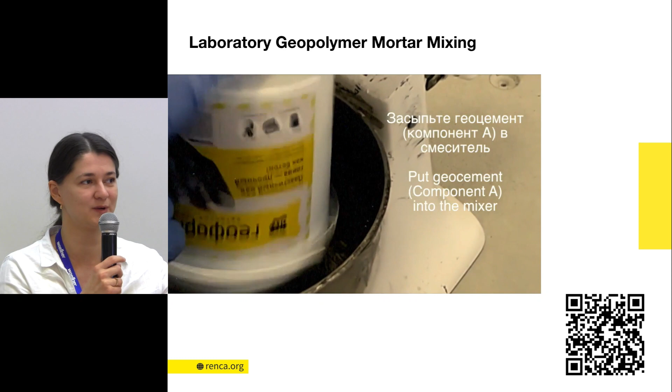We made this video to teach people the correct mixing procedure: making the binder first, then adding aggregates, how much to mix, and what procedure to follow to avoid mistakes. Because when you tell people they need to make the binder first, some people will still mix everything together, so you need to show exactly what you mean. When we work in the lab, we have very small dosages of materials, so we can be very precise. We weigh all materials in grams and follow the procedure strictly.

When you work in the laboratory, you don't face problems with equipment. You only test your material for 3D printability most of the time, and you don't have to worry about the pump, cleaning the tubes, or the speed of the extruder—all issues you'll face later when you scale up.

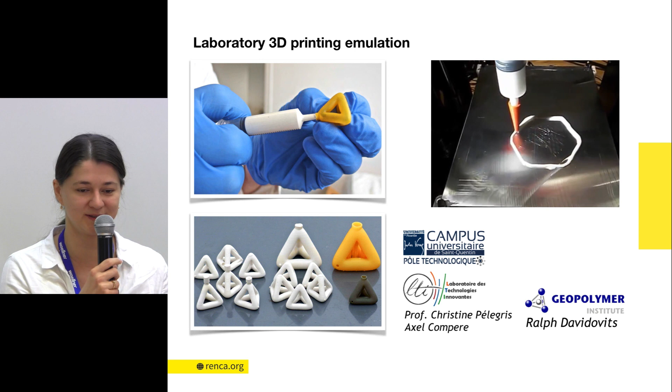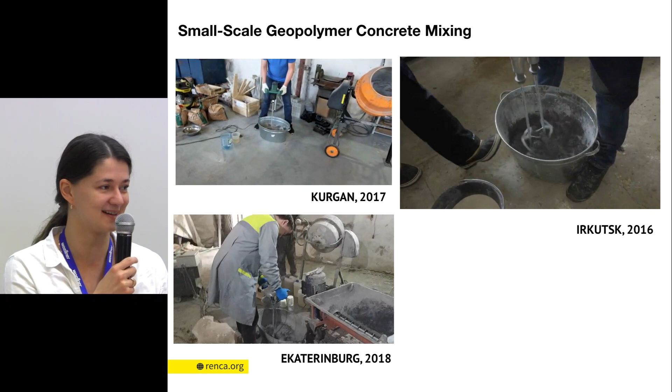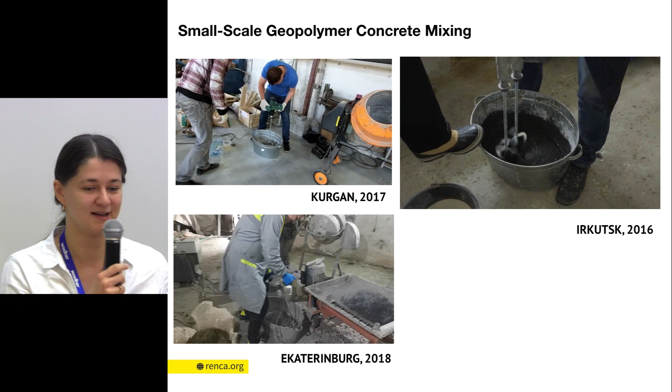In 2016, we had our first tests of 3D printing geopolymer. Everything was done manually, so the guys broke their backs, and of course the materials were brought by plane. The materials were very precisely dosed, we had a perfect composition for our recipe, and the results were amazing. With some recipes we got 80 MPa, with others 50 MPa—much more than enough. We had success from the first attempt.

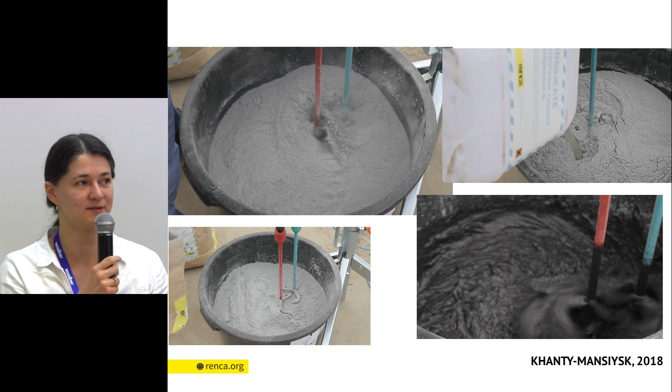After the guys had problems with their backs, we advanced to a better mixer with support. But the dosing is still manual, so you can bring materials from far away—cost isn't a big issue, though you have to buy some materials. But it's very dependent on the person mixing, so you need very well-educated engineers for dosing and mixing, because we had issues when we tried to teach the 3D printer guys how to mix geopolymer.

Each batch was different even though the recipe was the same, everything was the same, and we were watching them. But each time something was different—one time they didn't clean the mixer, another time there was material left in the bucket, another time they thought, why should we be so precise, let's just add a little more water or whatever. So one time you'd get 30 minutes of setting time, another time an hour and a half—for 3D printing that's crucial, very critical. Each batch ends up unique depending on who is mixing it.

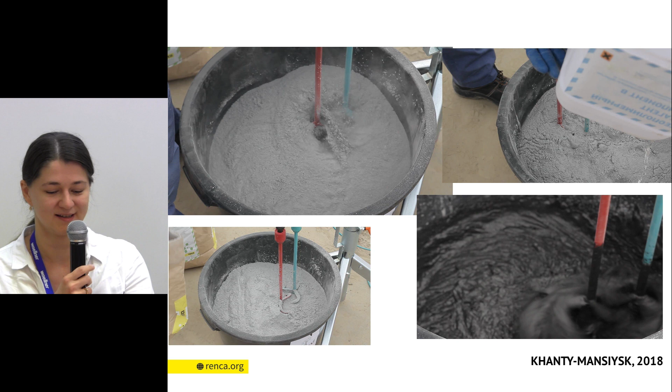As I said, you can bring very expensive materials for this small-scale pilot project. We brought them by plane to Irkutsk from another part of Russia, and I know we can send to Italy, Axel can send to us, and the cost of the final recipe can be up to 10 euro per kilo, which is not scalable at all if we're talking about construction.

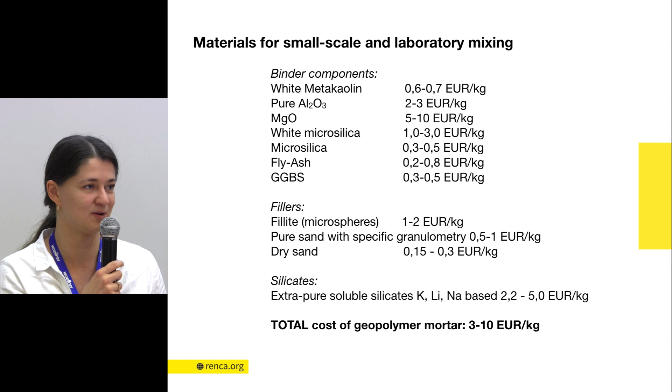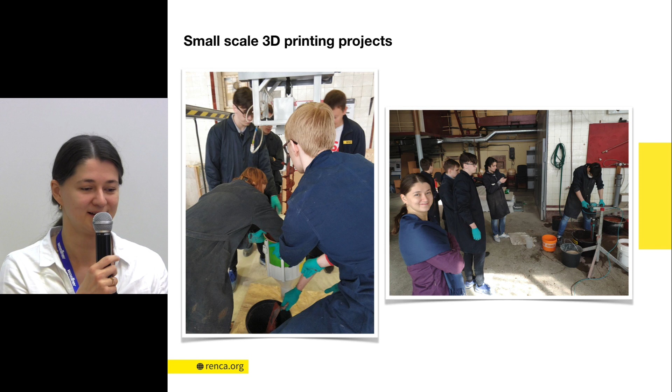For 3D printing small projects, you don't think it's all automatic right now, that you press a button and the printer does its job. No, it's about 10 engineers running around, fixing all the parts of the machines, fixing the mix. For now, it's still small-scale 3D printing projects, really just testing.

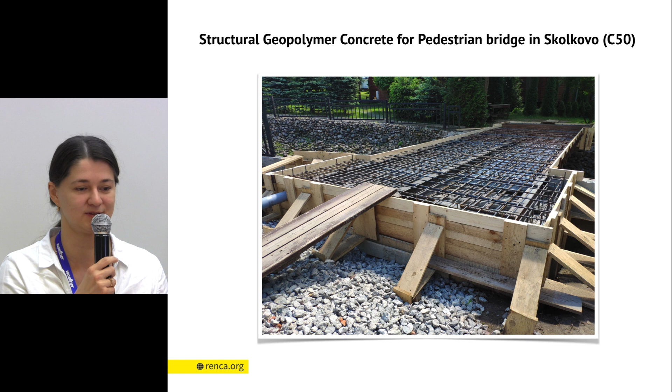So you have to prepare all your materials at your job site in advance. You have to dose them. What we do is have a bag, precisely weighed, with a precise weight of reagent that you put into this bag, and precisely weighed aggregates. It's the only way to try to avoid mistakes at the job sites, because people will weigh the material, you see the mixer, not in grams, but in buckets and the amount of buckets and spades that they throw into the mixer.

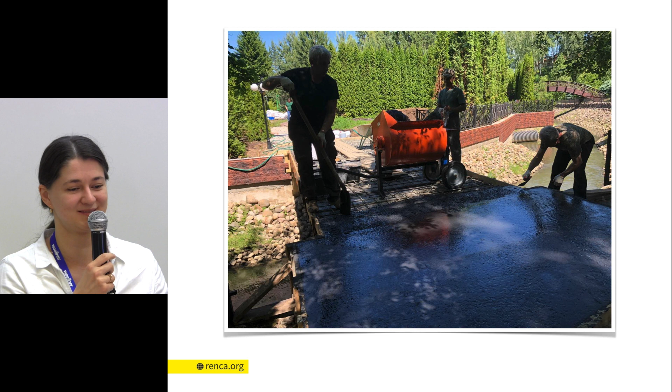So to avoid mistakes as much as possible, you have to do everything in advance. Here, the high-tech should be as minimum as possible - you should do all your high-tech before.

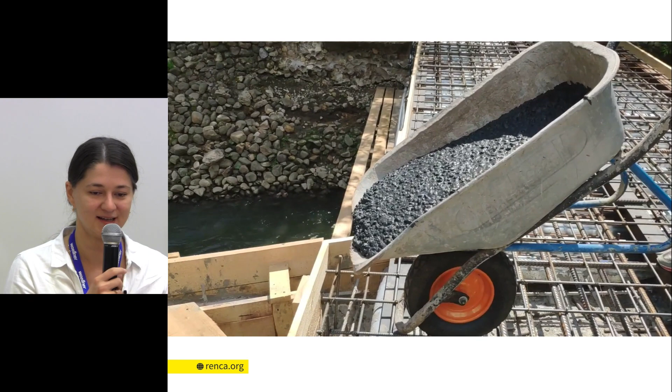And so the equipment is really basic. Of course, the preciseness of these recipes is much less, but we don't need extra high super performance concrete here. The task was to get C50, so we get this C50 easily with geopolymer, because geopolymer can afford much more strength. We try to make it a little bit more, to make this kind of gap, because we knew there would be some mistakes and fluctuations on the job site - it's unavoidable when you deal with people.

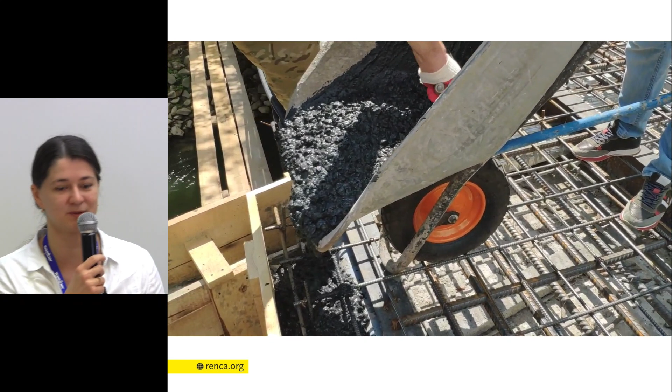So this is how we now supply the material. It should be precisely weighed and dosed in advance.

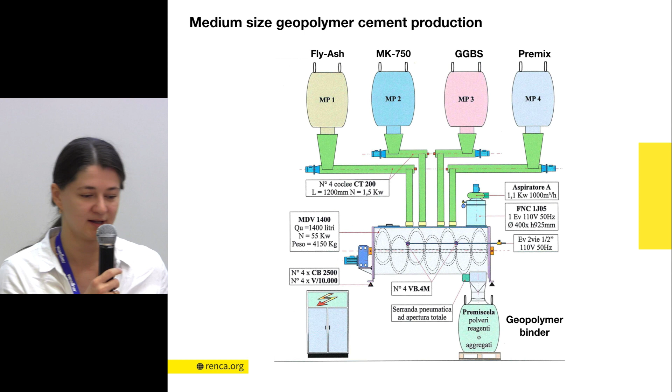So we need equipment to produce geopolymer right now. For medium-size geopolymer cement production, you don't need a very big mixer, but it is still equipment, so you need to put investment - you cannot make it by hand anymore. It's not a laboratory anymore, and you also bring materials not in small bags anymore. You have to pay for your materials, you have to deliver them, so you have to really look for the source of material closer to you, cheaper to you, so you have less choice, and you have to work with what you have, with what you can get cheaper.

You still don't buy it by full trucks, so the cost for you will be much higher than for bigger production, and we will talk about costs a little more.

And now we go to the most important thing, the cost of raw materials. It's a good example that we have with fly ash. For example, when you buy it like one ton, the fly ash itself costs 2 euros per ton at the factory, at the power plant - so it's nothing, it's very cheap. But then you cannot buy it in a truck, you need a big bag, for example one ton. The factory itself, the power plant, doesn't sell in big bags - they are not working with that.

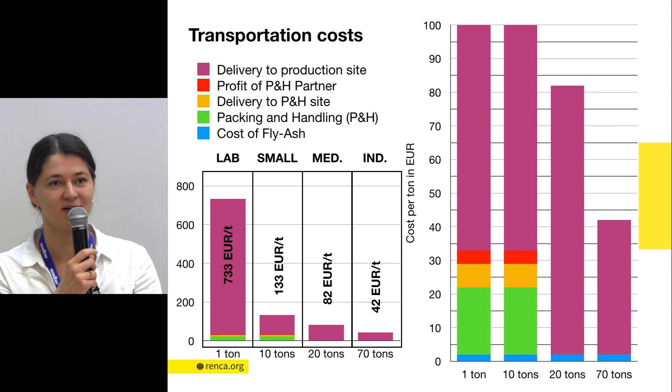So there is a partner who is handling fly ash. This partner needs to earn money. He needs to transport fly ash from the power plant to his site, and process it into big bags. So we add the price of the big bag. This is the green part, which adds a profit with the packing and handling, then delivery to their site, and a small profit for this partner who is doing the handling.

Then we need to deliver this fly ash from this partner to our site, and this is the biggest cost. It costs more than 700 euros, because nobody will just go with 1 ton. There has to be a full truck, and the full truck costs 700 euros. So your 1 ton of fly ash turns from 2 euros to more than 700 euros if you buy only 1 ton.

If you need 10 tons, it gets a little lower because you divide the same cost across 10 tons, but you still need a handling partner to put it all in big bags. You only start getting some economy when you buy into 20-ton full trucks without big bags, so in bulk. But to buy bulk, you need your own silo storage. You need a bigger production site of your own, and then the cost becomes more reasonable, but still not 2 euros.

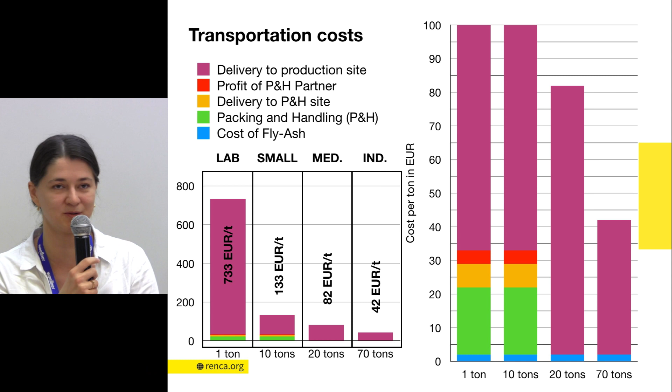Because when people start calculating the recipes, usually they think fly ash costs 2 euros, it's nothing, let's use fly ash. But then you need to calculate how much it will cost at your site, and whether you can receive it in bulk or not.

So make all these calculations. And when we go really industrial, you need to have silo storages. You need a big investment into your production site. Here you reduce operational costs on your products, on transportation, on all your raw materials, but you need to have an investment.

The first thing you need to think about when making a geopolymer production plant is where to place it. For example, in Russia, we have this situation: we have resources in the eastern part, most of the raw materials are there, but the clients are in Moscow and St. Petersburg, which is 2,000 kilometers away.

So it's up to us to calculate where we should make it — near resources, where transportation of resources will be cheap for us, or near the client, where transportation of the ready good will be cheap for us. This is something you need to calculate on your own, depending on where you are.

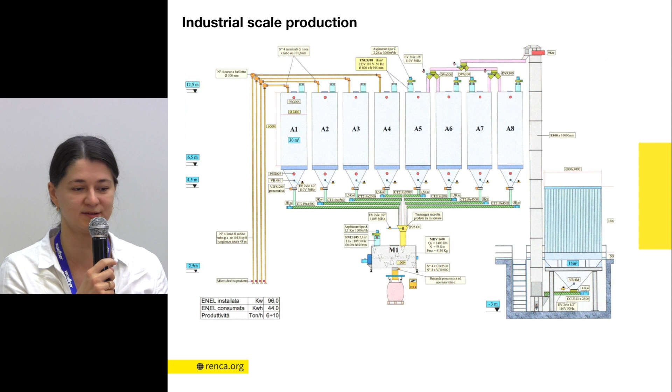For industrial scale, you need a real dry mixing plant, but the investment is not comparable to Portland cement production, where you need 200 million euros minimum for one plant. Here we need 20 times less investment. We just need a dry mixing plant, and we don't need kilns or to burn gas or whatever.

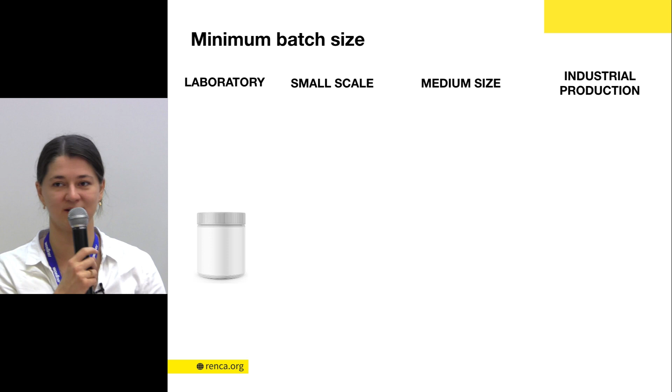But there are limitations that come with the big scale. When you have a laboratory, you can make, say, 50 grams of 3D printing mortar, then 50 grams of repair mortar, then 50 grams of construction geopolymer according to request.

But the bigger you go, the bigger the minimum batch you can produce. You cannot produce a small mix of 5 kilos — you need to produce several tons, several tens of tons. So you need to have orders for this kind of product. The range of products you can produce goes down, but the amount you produce of one product goes up. All this reduces the final cost of the product the bigger you go, but there are certain limits.

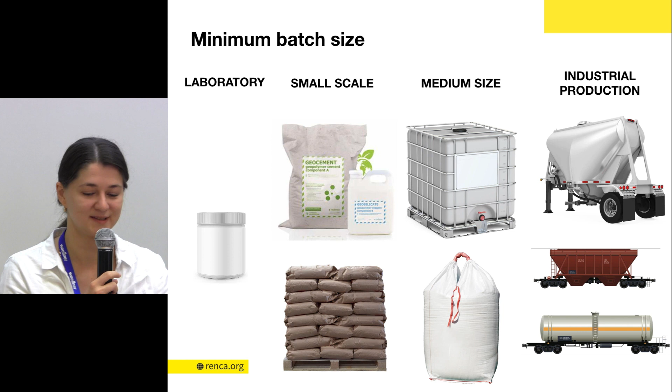So if you have questions about economy, you can ask me, but I will switch now to the more technical side, to Andrey. Okay, let me speak now a little bit more about industrial application of geopolymer concrete and products based on it that we have done.

One of the products that we have realized is humid earth blocks and pavement tiles. This is a product without a high amount of binder. It has a humid earth consistency, and we have one project going on right now, developing and adapting the geopolymer cement to produce these construction blocks.

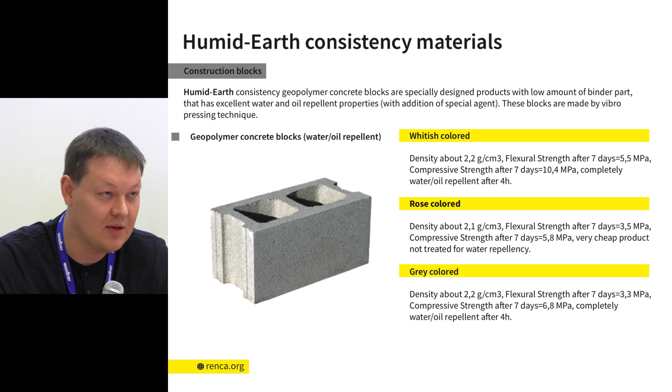These blocks are more resistant to aggressive substances and corrosive media, and it's also possible to make them oil and water repellent. Taking this into account, this kind of product must be cheap. We offer a solution that, for example, for pavement self-locking tiles, only the top layer needs to be made of geopolymer, and the rest is the cheapest based on ordinary Portland cement. This allows us to save cost and give the final product some unprecedented properties.

The other material that could be used with geopolymer is hemp. It's a very interesting material, especially when combined with geopolymer cement. Like humid earth blocks, it's pressed and formed into panels or blocks. This material doesn't burn, it can have compressive strength more than 100 MPa, it doesn't ignite, and it can also be a thermal insulating material with structural properties.

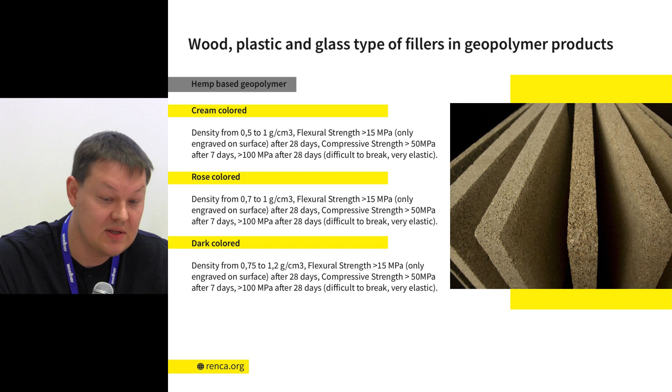This is a challenge that Renca is taking on, developing sustainable solutions for waste utilization, and we are part of the National Geographic Innovation Challenge, the Ocean of Plastic. So beside hemp, there are many types of recycled and waste material that could be used in geopolymer, because they are encapsulated inside the structure and completely mineralized.

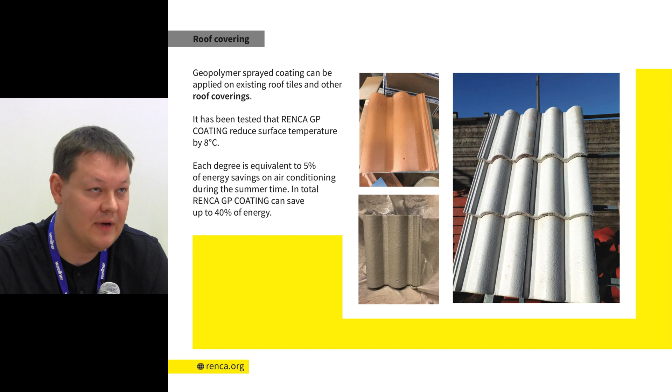Roof covering with geopolymer is also one of the unique solutions. It's possible not only to make the whole tile out of geopolymer, but also to apply geopolymer spray on existing roofs. We tested this, and the temperature on the surface of this type of covered roof was 8 degrees lower than on a roof without the coverage. Each degree is equivalent to about 5% of energy, so in total you can save up to 40% of energy for cooling the house during the summer period.

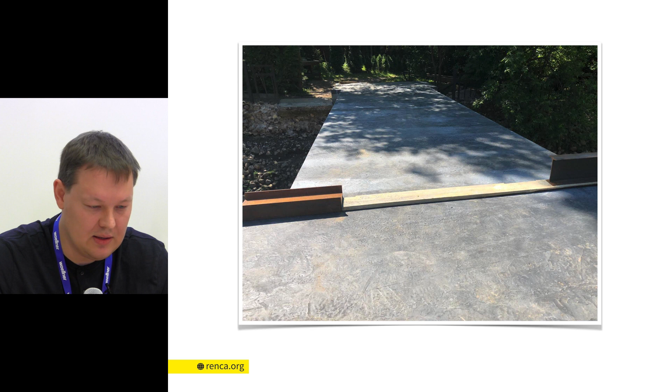This is another example of industrial application, which Marina told you about. And this is a final pedestrian bridge. This client liked geopolymer concrete so much that they asked for more, but in different colors, so we offered them red. As Joseph told yesterday, red is beautiful. We say red is the new green, and we try to be in line with this fashion.

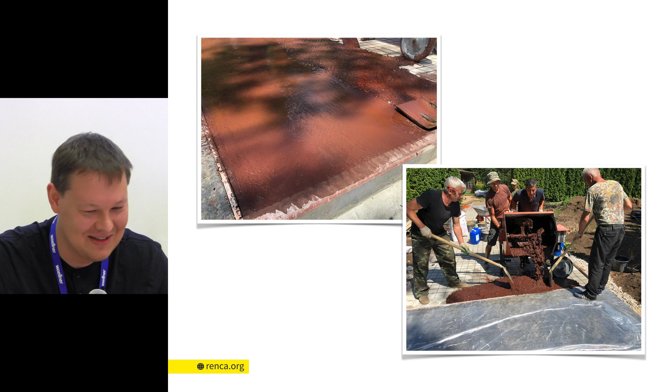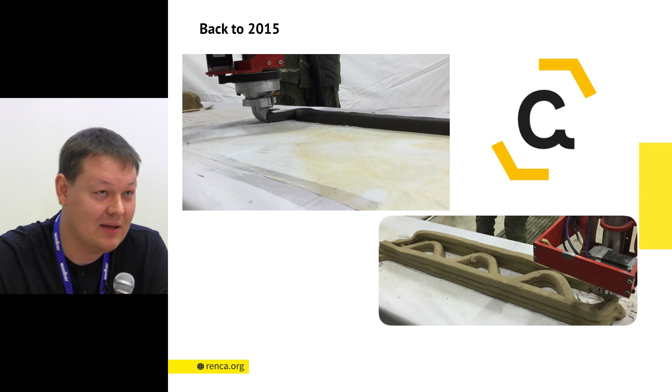Okay, so let's talk about construction 3D printing with geopolymer. It all started in 2015. Like today when we listened to Shima's presentation about the moon and said, haha, it's the moon - it was like something like this in 2015: geopolymer could be applied for 3D printing, haha.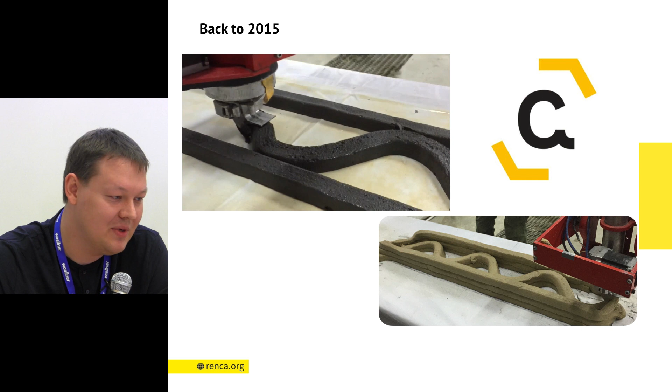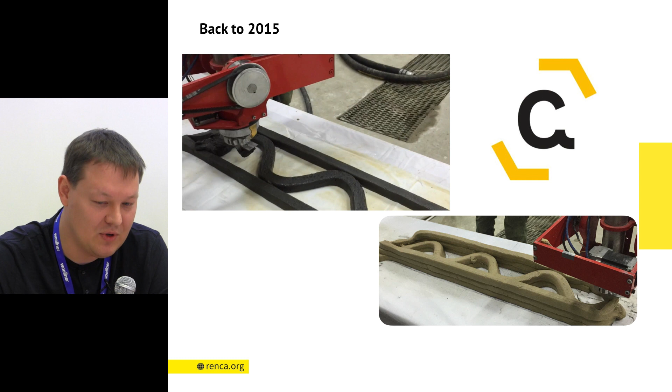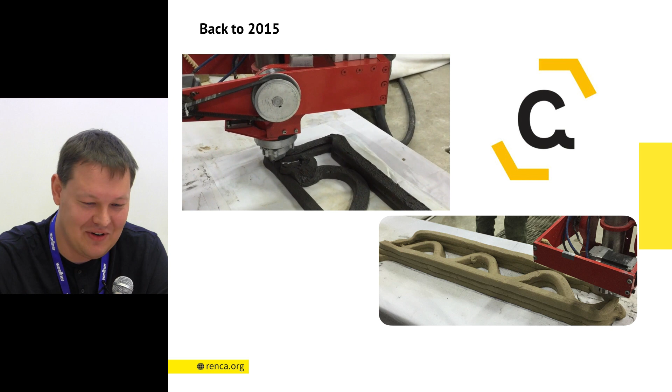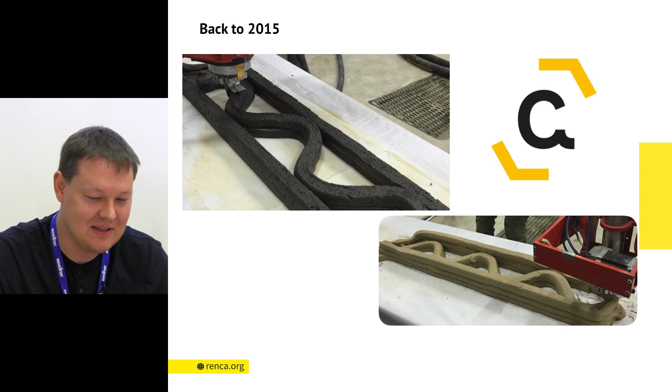At the end of 2015, we were contacted by Nikita from Apis Cor company, and he asked us to develop mortar for his 3D printer. We did it, and in January 2016, with Alex, we went to Irkutsk, in Siberia, near Lake Baikal. It was minus 40 degrees outside and plus 15 inside, and we tested three different recipes there: the black, beige, and gray one.

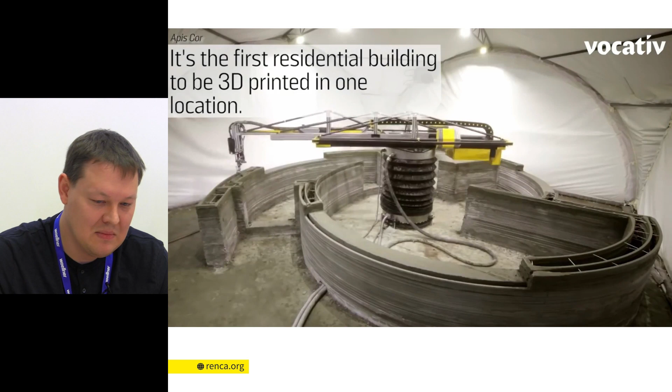If you're not familiar with Apis Cor company, this is a company originally from Irkutsk, Russia. They 3D printed a house in 24 hours, and they claim it cost as little as $10,000 United States dollars. This is a house built near Moscow, in winter.

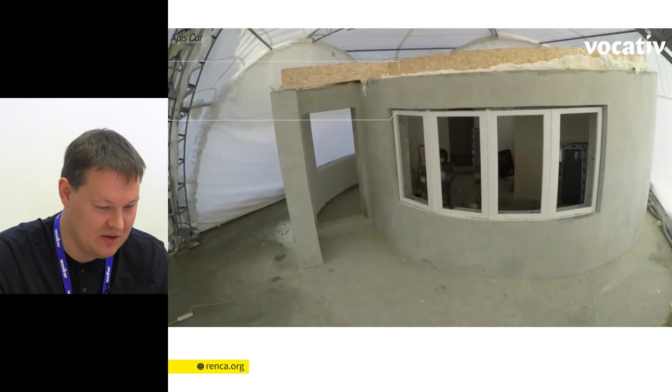Now they have moved to the United States, to Boston, and they've taken part in NASA's 3D printed habitat competition. Unfortunately, now they are not selling and producing 3D printers, they're mostly concerned about R&D, and we had to go our own way with 3D printing.

So in Irkutsk in 2015, the first idea came of needing an automatic mixing system for geopolymer concrete. In 2017, we were invited by the government of Dubai to take part in Dubai Future Accelerators. It's a government-sponsored accelerator for innovative companies, and Dubai is very keen on construction 3D printing.

Dubai has a government program stating that 25% of each building by 2030 must be 3D printed. So at the end of the program - you're laughing, but it's true. In 2019, you will not get a construction permit if you don't have 2% of 3D printed parts in your building. In 2020, it will increase, and by 2030 you will not get a construction permit without 25%. You can't build a house with 25% plastic handles - you have to have something structural, so that will force you to implement 3D printed elements in the building.

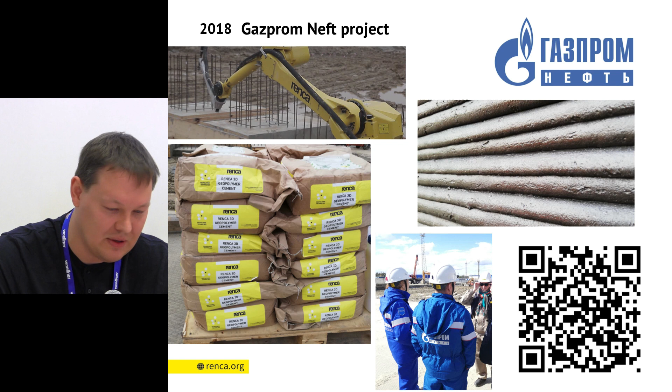Now we're in collaboration with Polytech University in St. Petersburg, helping them with their 3D printing programs and trying to promote genuine geopolymer technology among students and professors, because there is a big mess about terms, about sources of information, about alkali activation, and misunderstandings.

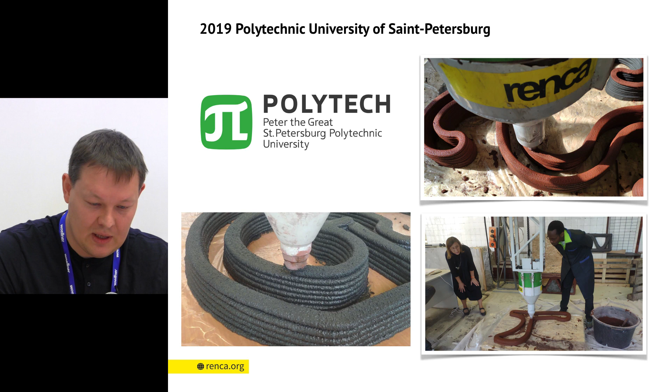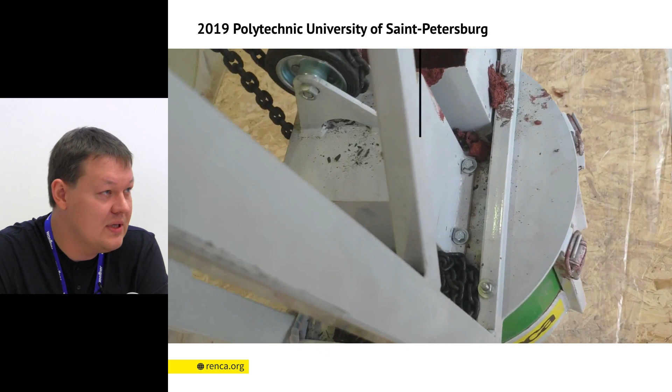We have developed geopolymer 3D printing mortar for this portal-based gantry type 3D printer. This is a kind of video. Together with the students, we not only study the recipes, but they also have the equipment to study different shapes, behavior, and construction properties of 3D printed objects made with geopolymer.

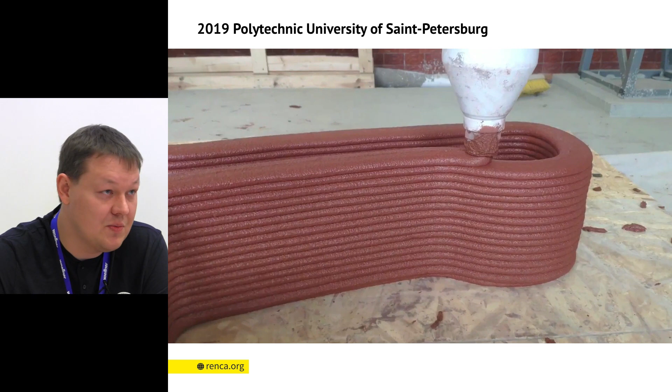It is a very small structure in the video, done in like 10 or 15 minutes, but it showed that the mortar can hold half a meter in height.

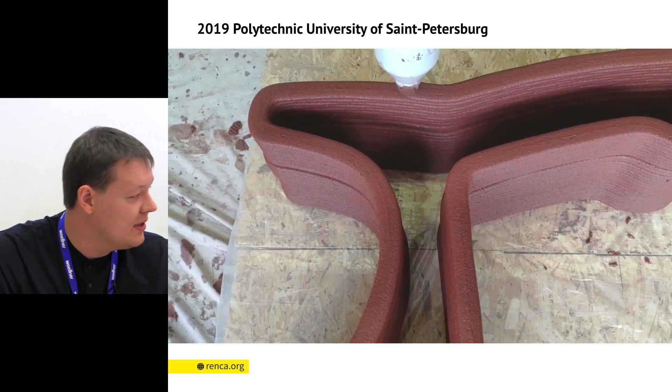You can see the samples here on the desk, so you can touch and see that the geopolymer mortar has the advantage of not having any cold joint between the layers, because with Portland cement, cold joint is quite a problem. But with geopolymer, it has very good adhesion - you can stop, take a break, or stop for the night and continue the next day, and in the end you'll have no joints.

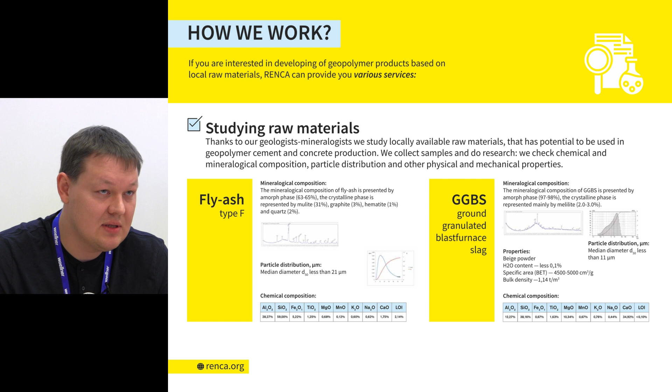So how do we work? We study the local available raw materials, starting from the mineralogy and chemistry. We take samples from local materials, develop new recipes, do testing - as the professor explained before, put it in the water - and at the end, when we get the perfect result, we go deeper and do tests of freeze-thaw cycles, resistance to acid media, and so on.

At the bottom right corner, you see the test of acid resistance for geopolymer concrete. Before that, we didn't know - we hadn't had a standard, so we used a 10% sulfuric acid solution. Now we will definitely use a 5% solution, so we can compare results among other researchers.

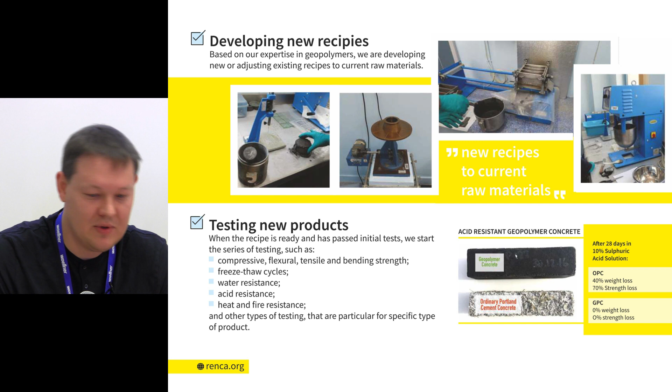Developing standards is very important because it allows us to compare what we've done in our lab with what you've done here, and so on.

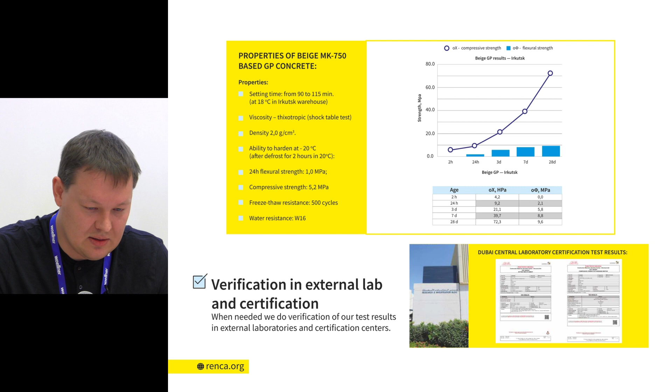Of course, if a client needs it, we do verification in an external lab. So we've done such tests in Dubai Central Laboratory in order to show the properties of geopolymer mortar for 3D printing based on their material.

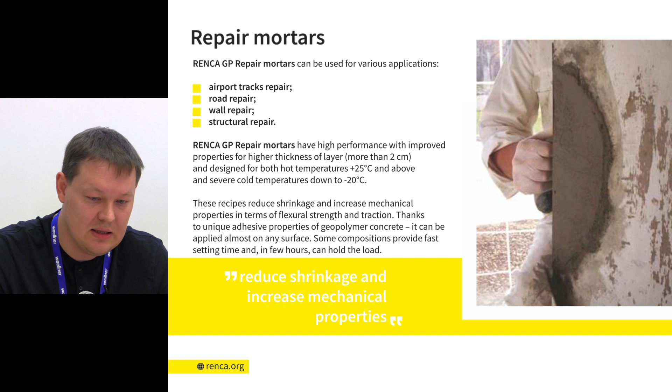We produce geopolymer cements and geosilicates. One of the main products is repair mortars - ready products that can be applied to airport tracks because they're fast hardening, as well as road repair and wall repair. Of course, we also have 3D printing mortars for different temperatures, for winter and summer, because it's very dependent on this.

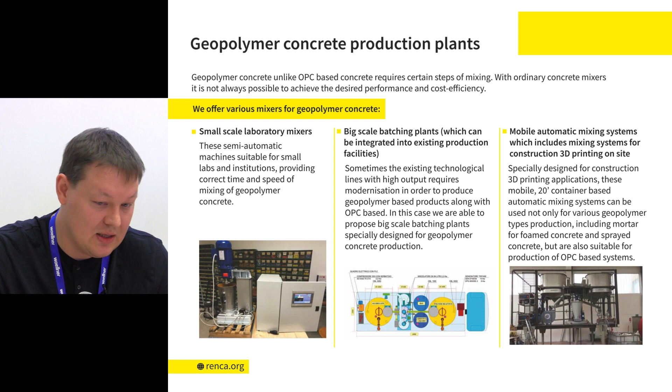With the cooperation of our Italian partners, we can offer a full line of equipment for geopolymer cement production. Alex will tell you more about the small-scale laboratory mixers, medium-scale, and big-scale. I will show you the scheme for possible integration of a geopolymer binder or cement mix unit into an existing concrete plant when you scale to a real plant.

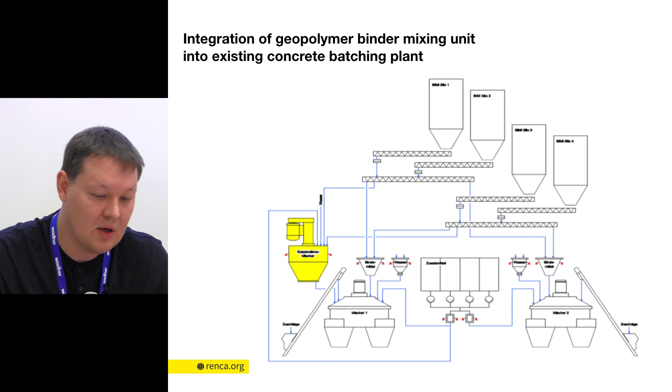So it will prepare, dose, and correct mix the geopolymer cement, and when it's ready, it will discharge it into the existing mixer, and it will be mixed with aggregates, a conventional way to prepare geopolymer concrete. This solution allows saving a lot of costs on the full-size concrete plant, and makes it possible to produce geopolymer concrete along with OPC on the same equipment, especially if you already have silos or mixers for OPC production.

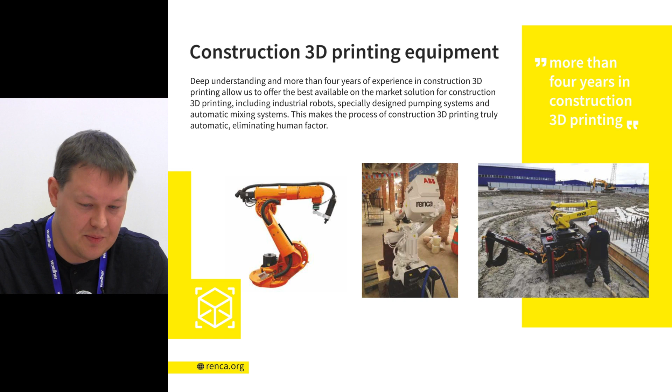We have been working with almost every type of existing 3D printer and know exactly what to do to achieve the best results, and what type of mixer and pump to use. So we do consulting on the equipment you need for construction, 3D printing, pumps, and so on. We want to be an all-in-one partner, an all-in-one solution, starting from geopolymer cement production, concrete mixing, and construction 3D printing.

So we already have some international sales, and we are happy today that we have some representation from Curacao, and one of the representatives is here.

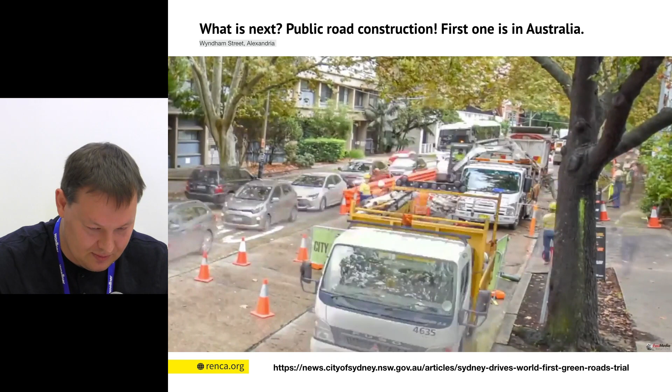And I saved some time to show you some recent developments in the world of geopolymer concrete. In Australia recently, in Sydney, Wagner's made a part of a public road to the airport. This is a video of how they made it with geopolymer concrete—now you can go to Australia and see it. This is the world's first roadway made with geopolymer concrete.

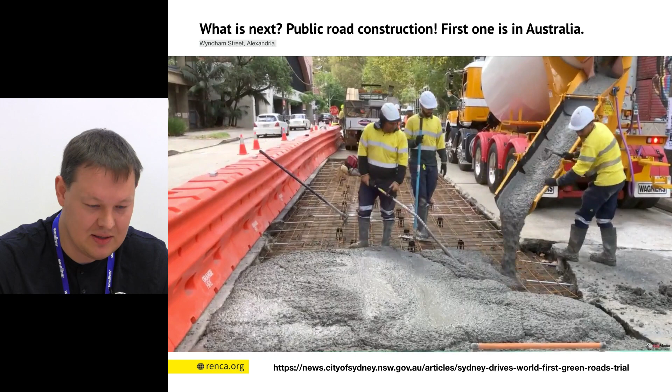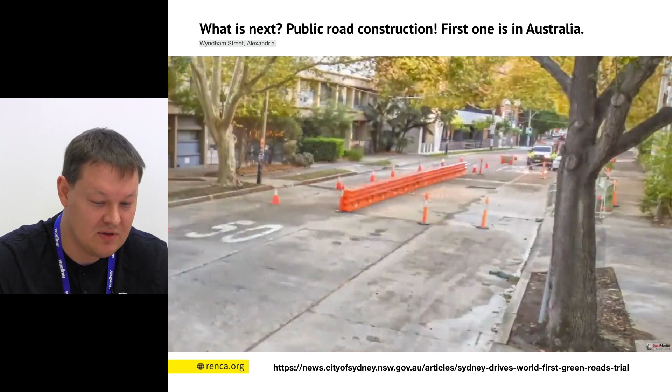It's short, but it's on a public road. Researchers from Sydney and the CRC for Low Carbon Living Institution will use the results from that trial—they installed some sensors inside—and they will use the results to create the first set of industry guidelines for geopolymer concrete.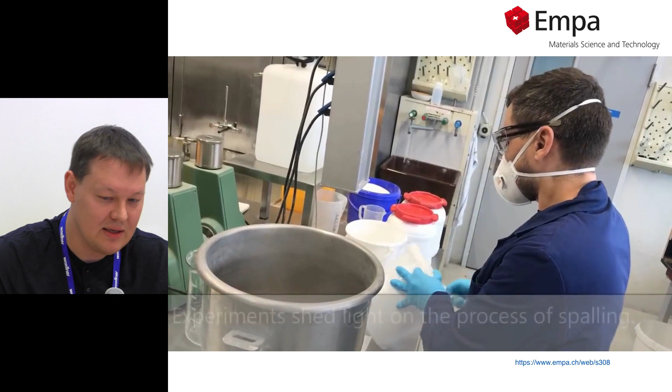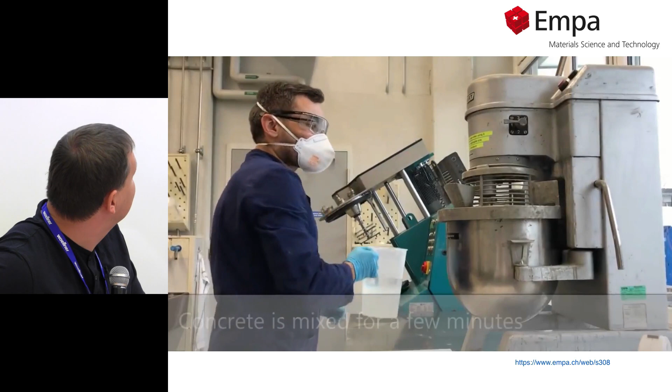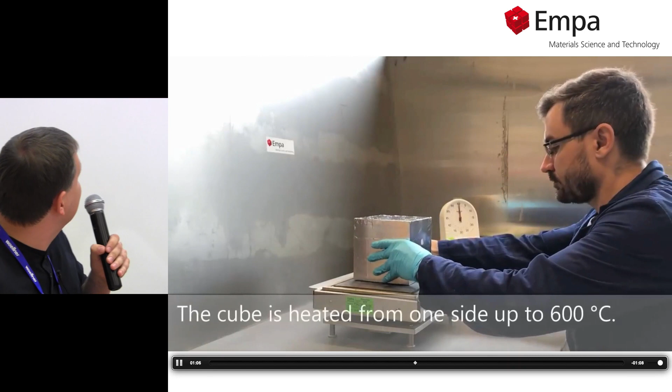The water, which is on a molecular level inside the structure, started to boil at 600 degrees Celsius, and it just... they prepared the sample, covered it, put it on a heater at 600 degrees, and started to heat it up.

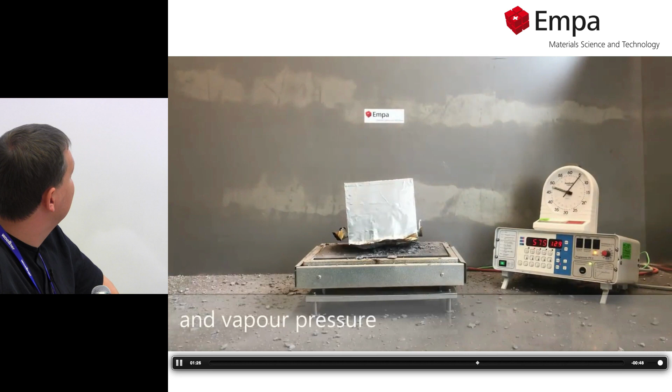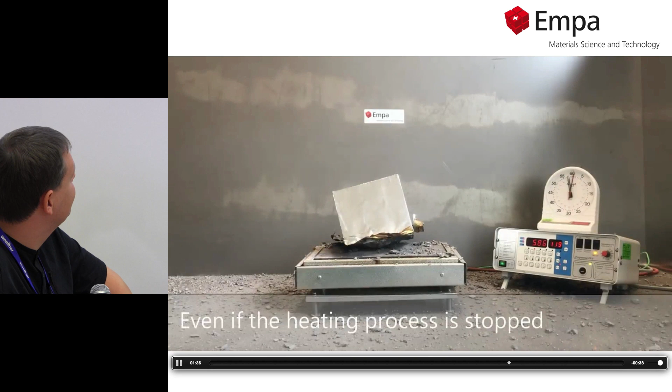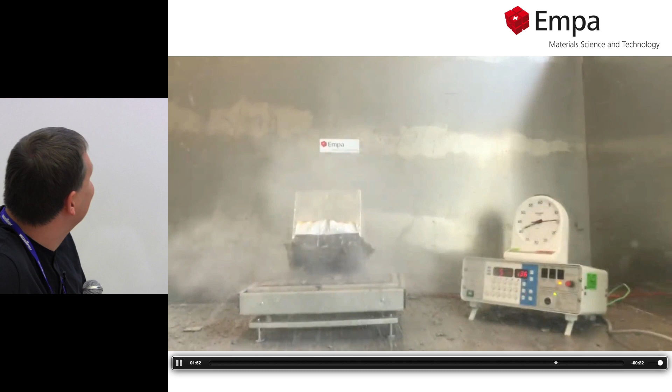We also try to spread our knowledge of geopolymer among young people, and this is our daughter presenting at the conference for natural science, a school conference about geopolymer. She was here the previous year and the year before, and I hope she will also follow our tradition of making geopolymers in the future.

The Geopolymer Institute and Professor Davidovits sponsored us in our crazy adventure two years ago when we went to the Mongol Rally—a charity rally devoted to saving rainforests. You have to go in a really small car with a low engine, below 1.2 liters, from London to Mongolia any way you want.

So this was our route. We didn't only go to Mongolia, but we went from our city, Chelyabinsk, which is in the middle, the center of the world, all the way to the Geopolymer Camp. And after Geopolymer Camp, we started our rally from London to Mongolia.

We crossed several continents and crossed the border more than 16 times. It took us more than two months and 30,000 kilometers. But there were a lot of impressions, meeting with people, and the main thing you learn is that all people are very good and nice in the world—there are no bad people in the world.

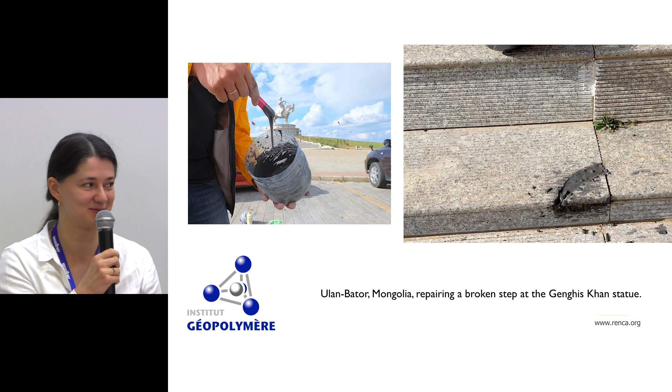Everybody is very helpful. And of course we couldn't stop making geopolymers—we made the highest geopolymer in the world at 4,655 meters to repair a sign in Tajikistan on the Pamir Highway. We also repaired the statue of Genghis Khan in Mongolia, the biggest horse statue in the world, because the tile adhesive used there wasn't very good, so we had to repair it with geopolymer. So thank you.